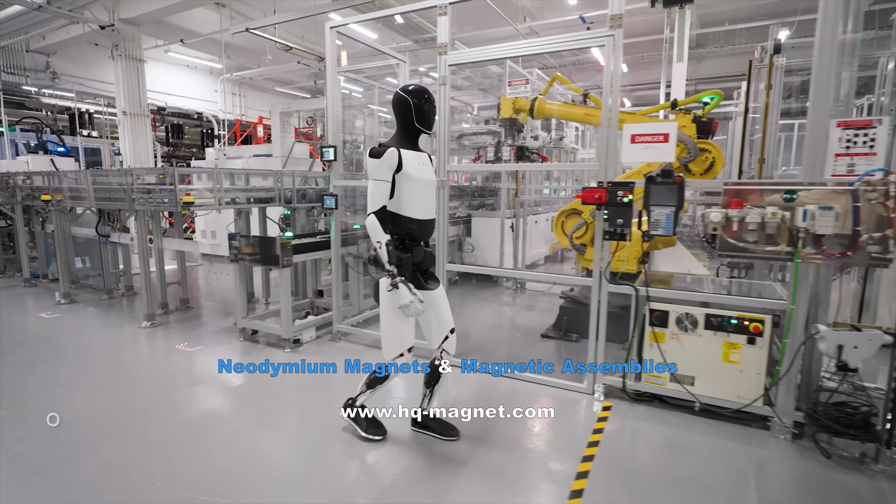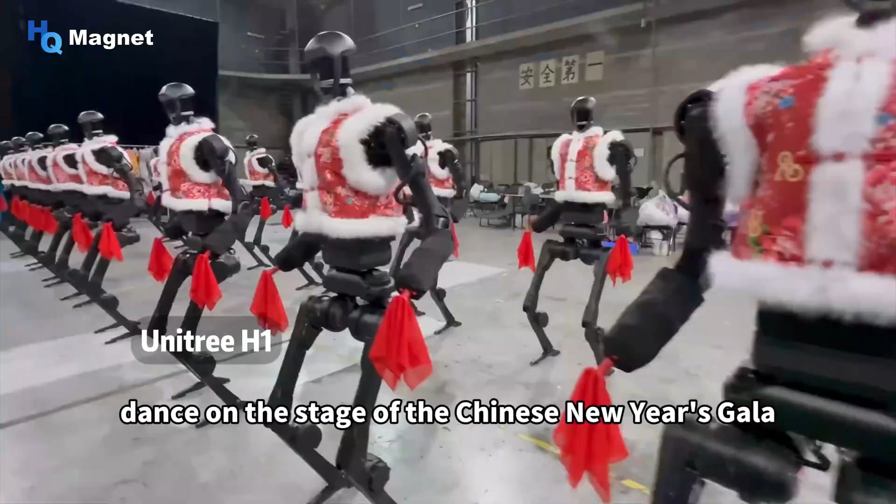From the Tesla Optimus working in the California factory, to the Unitree H1 performing the Yangko dance on the stage of the Chinese New Year's Gala, the revolution of intelligence and automation driven by motors is turning science fiction into reality. Just like the scenes in the Terminator movies, humanoid robots have now stepped out of the movie screen and entered the real world. It seems that the tipping point for the explosion of the robotics industry has arrived.

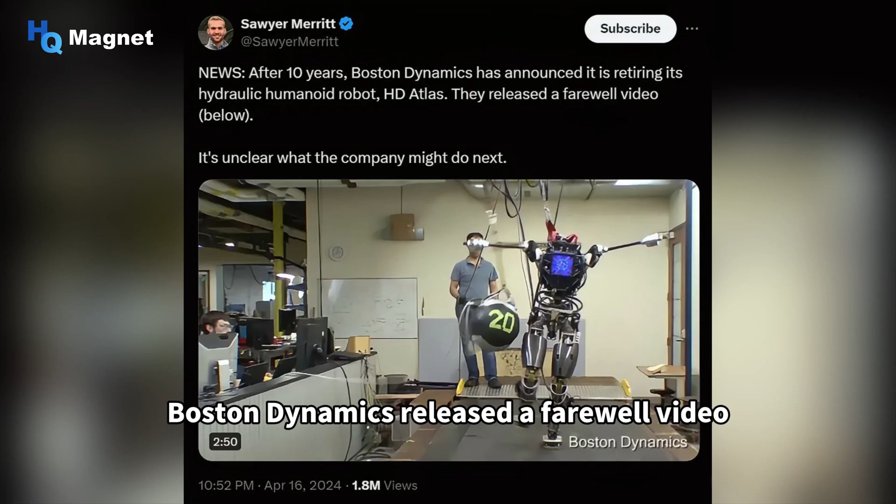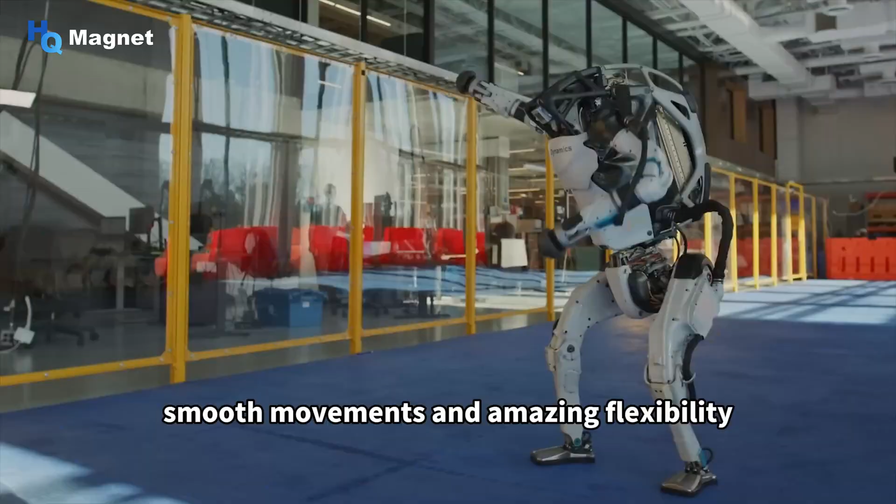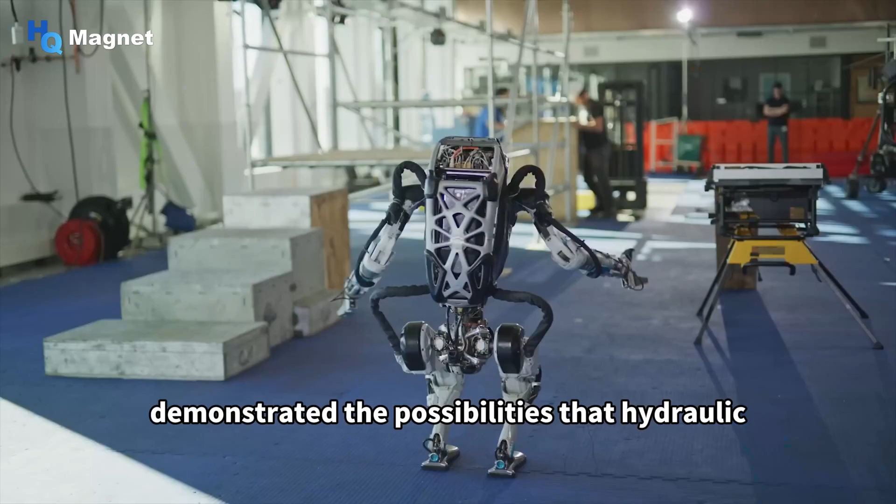On April 16, 2024, Boston Dynamics released a farewell video and announced the retirement of its legendary robot, Atlas. In the video, Atlas gave its final performance with its iconic smooth movements and amazing flexibility, including those complex walking, jumping, and backflip movements that once amazed the world. Every movement demonstrated the possibilities that hydraulic technology has brought to humanoid robots over the past decade. As Atlas slowly bows at the end, the era of hydraulic robots drew to a close.

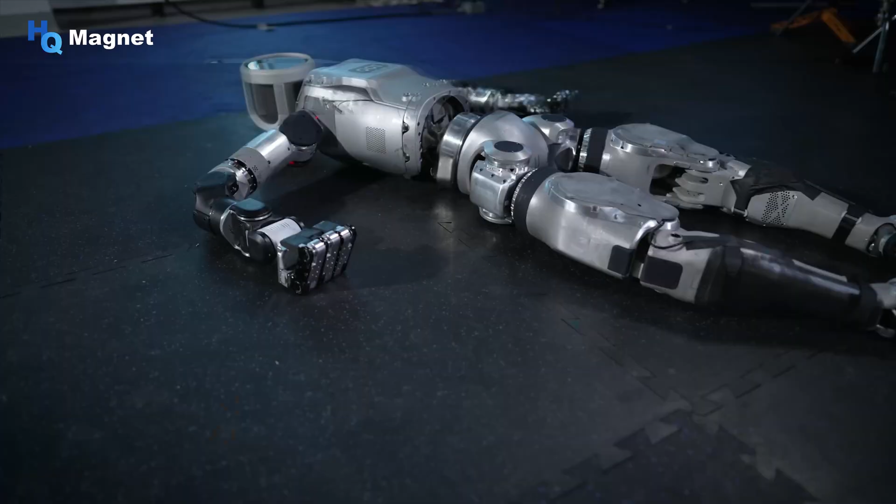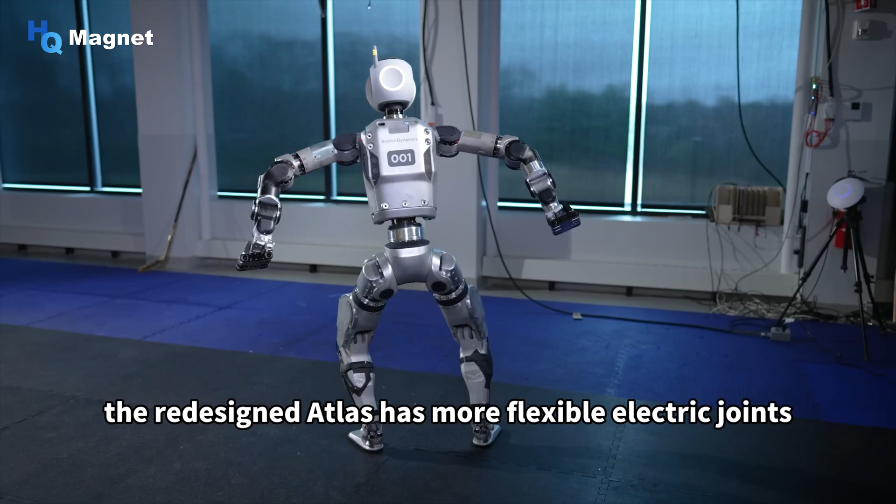Merely one day later, Boston Dynamics unveiled its next-generation Atlas powered by electric motors. The redesigned Atlas has more flexible electric joints, and multiple joints are capable of performing a full 360-degree rotation in all directions. This is a direct benefit of its advanced electric drive system, which enables unprecedented range of motion.

So why did Boston Dynamics transition from hydraulic systems they had been developing for over a decade to electric drives? At the 2024 World Robotics Conference, Marc Raibert, founder of Boston Dynamics, provided his perspective. He believes that hydraulic robots will continue to have applications in the construction sector, due to their superior load-bearing capacity and power output, but they face significant challenges in both commercial deployment and future improvements.

But I think that there's two things. One is that they are messy, and at least for high-performance things like we're in Atlas, with endless effort, we could never get them so that there was purely no oil coming out. And when you put oil robots into places like factories and homes, they just can't be dripping oil.

So that's one thing. It's very hard to find people who are skilled in the technology of hydraulics because people think of it as a very old world thing, even though Atlas has lots of innovation in how its hydraulics work, right to the servo valve, the HPU, the hydraulic power units, just all along there's really innovative stuff going on. And then lastly, I think electric motors have gotten strong enough so that at that scale, they can compete.

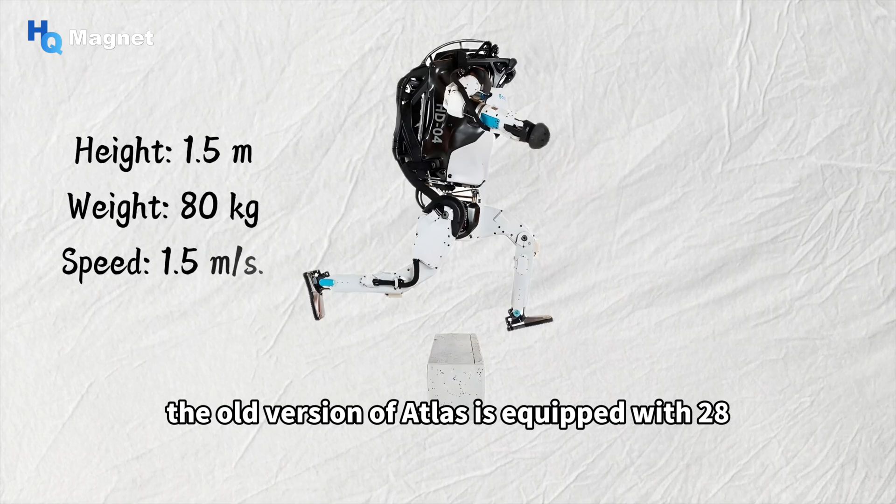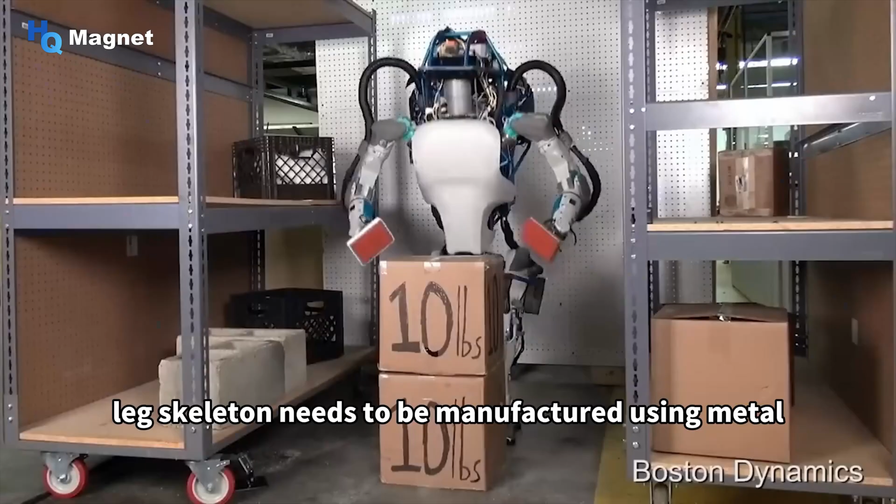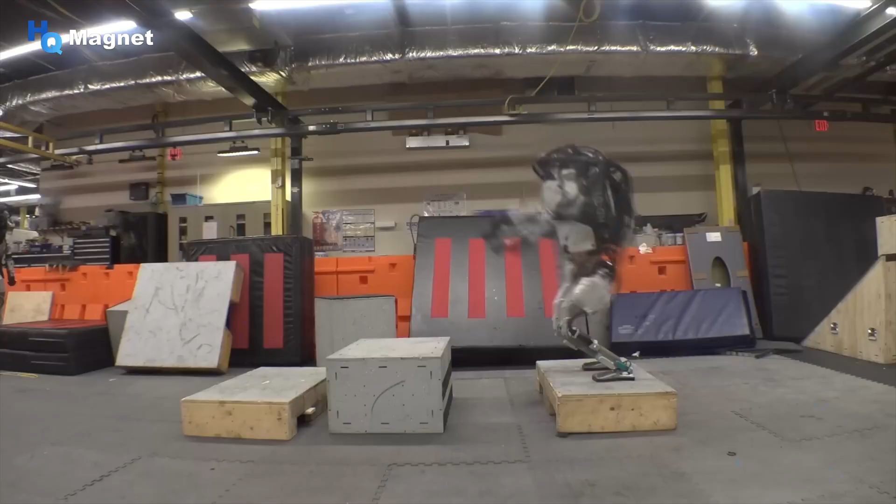The old version of Atlas is equipped with 28 hydraulic cylinders throughout its body, along with supporting hydraulic pumps, valves, and motors. The bionic-designed leg skeleton needs to be manufactured using metal 3D printing technology. The manufacturing cost of each robot is as high as $2 million, and the maintenance cost is also extremely high. It not only requires a professional team to deal with frequent failures such as oil leakage and cylinder bursting at any time, but also requires daily maintenance and regular in-depth servicing.

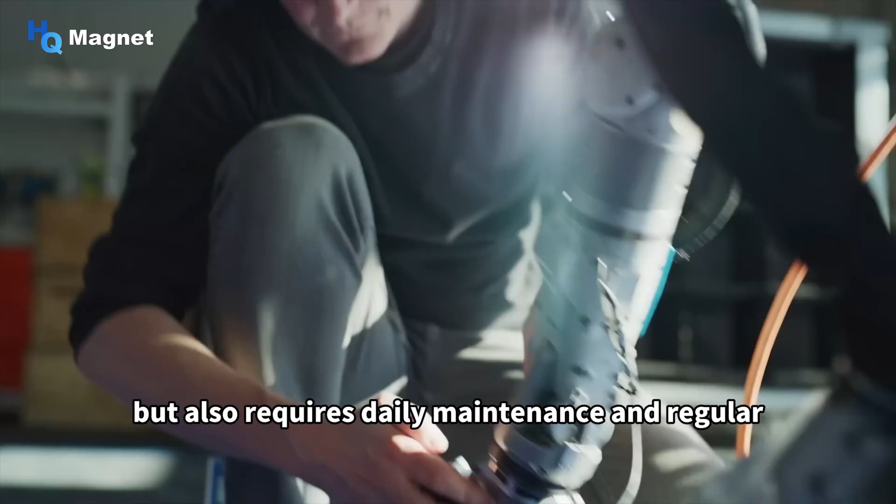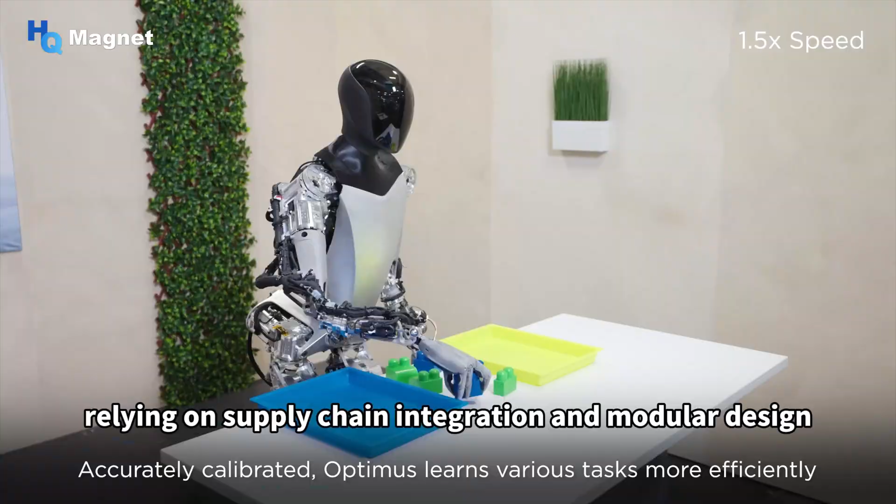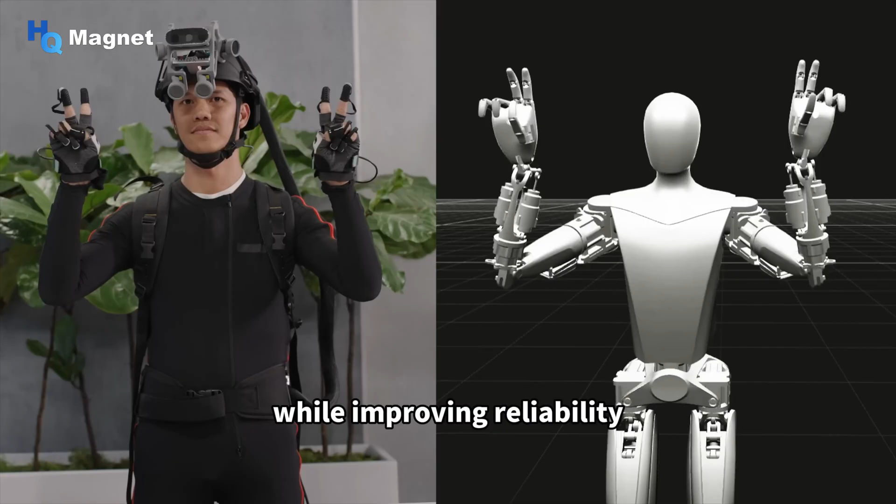Compared with the complex structural design and maintenance issues of the hydraulic system, the electric motor drive solution, relying on supply chain integration and modular design, has not only reduced the manufacturing cost to tens of thousands of dollars, but also significantly reduced potential failure points due to its simplified structure. While improving reliability, it has significantly reduced the maintenance frequency, which is of decisive significance for scenarios that require long-term continuous operation or remote operation.

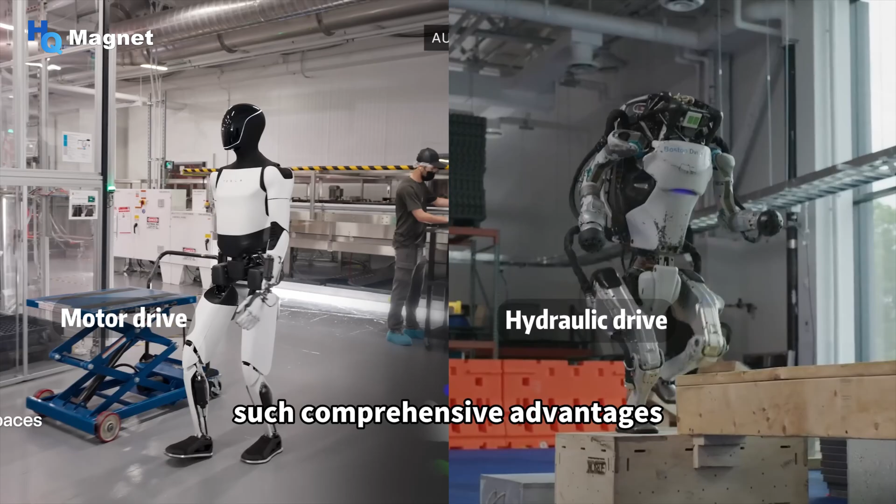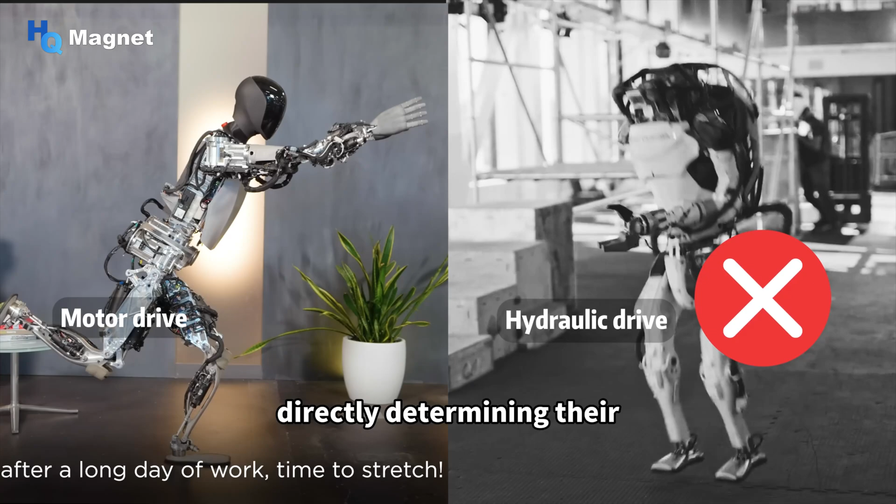Such comprehensive advantages, ranging from the design architecture to manufacturing and maintenance, have ultimately created an insurmountable cost gap between the two technical routes, directly determining their different fates in the commercialization process. Since the hydraulic system is so expensive, why did it become the early research direction for Boston Dynamics? Let's go back to the early 2000s first.

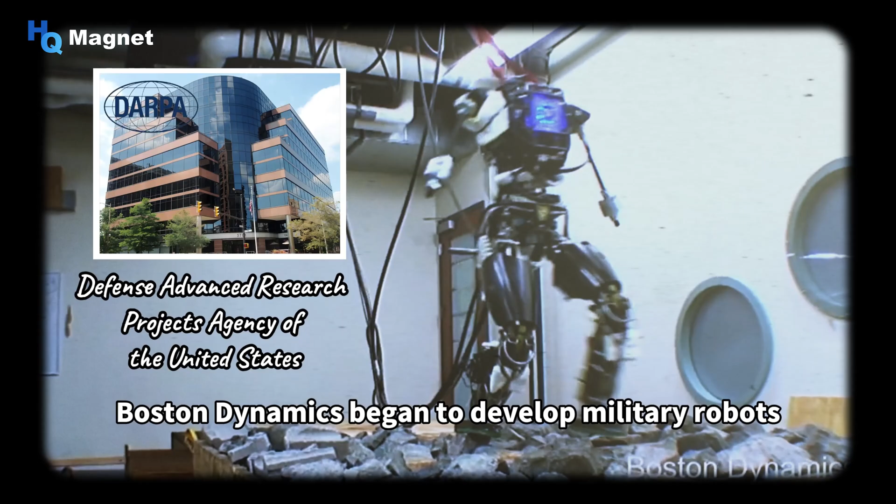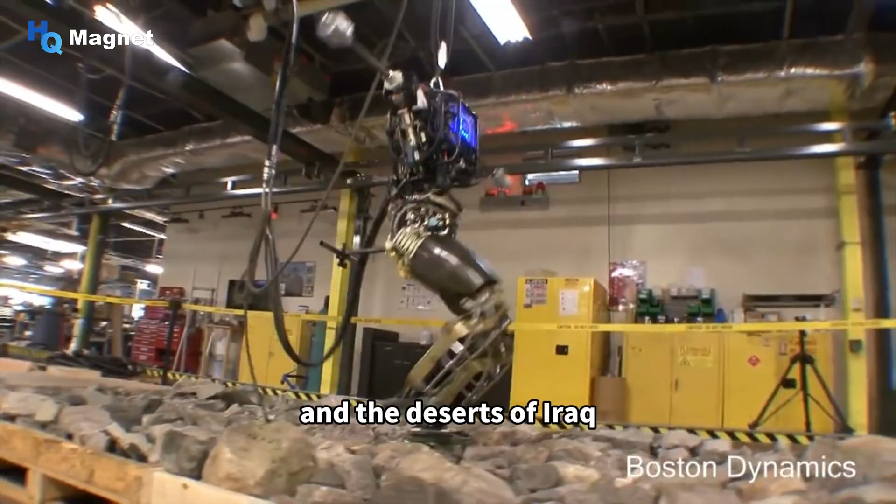With the support of DARPA, Boston Dynamics began to develop military robots. At that time, the battlefield requirements were extremely stringent. The robots were required to transport supplies in the mountains of Afghanistan and the deserts of Iraq, and they even had to be able to get up on their own after being knocked over by bomb shock waves. In such extreme scenarios, robots require robust dynamic capabilities to respond effectively.

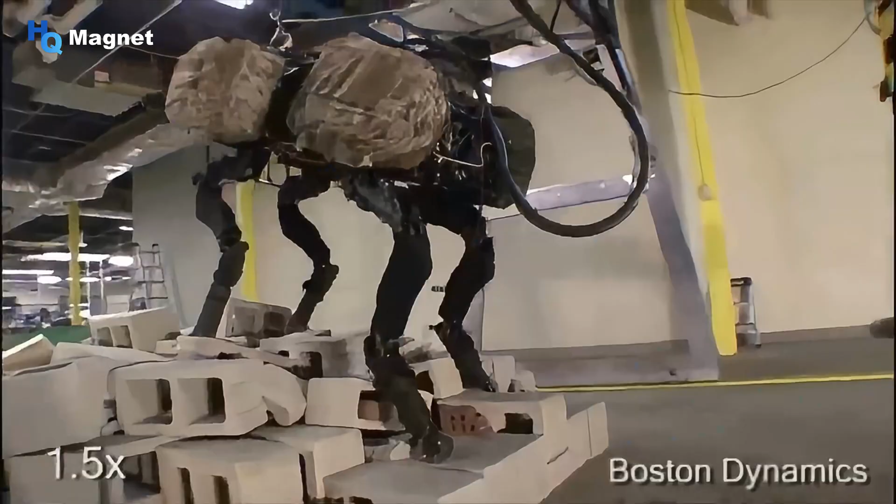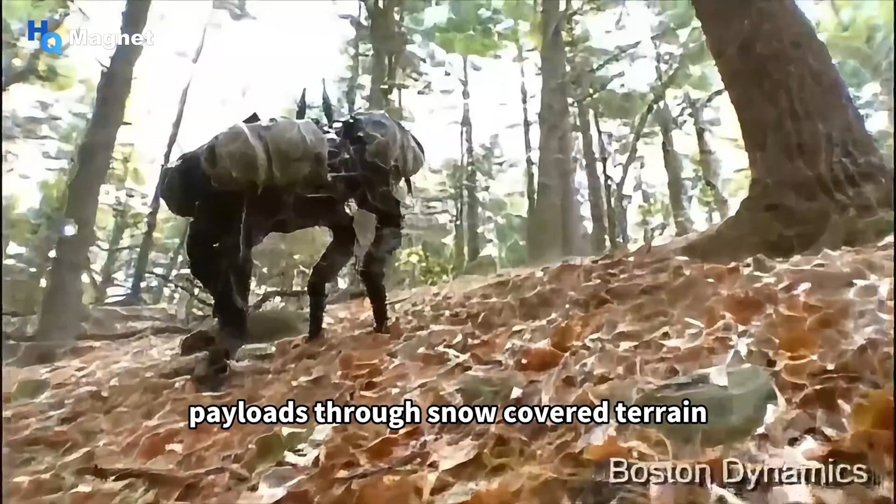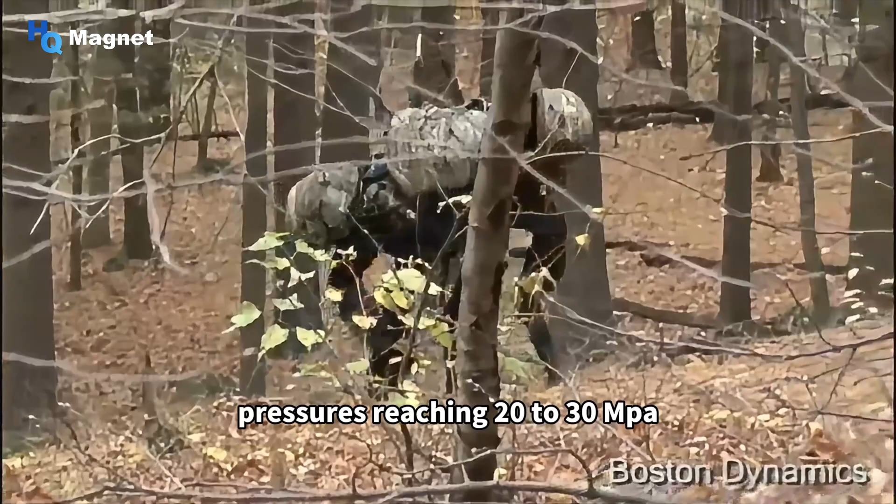At that time, electric motor technology remained immature, and hydraulic servo systems demonstrated higher torque and power density compared to servo systems of equivalent quality. The early developed Big Dog could carry 150 kilograms payloads through snow-covered terrain, with hydraulic joints demonstrating spring-like impact absorption capabilities. This formidable power originated from hydraulic pressures reaching 20 to 30 megapascals, equivalent to 300 atmospheres, enabling instantaneous power output several times greater than conventional electric motors.

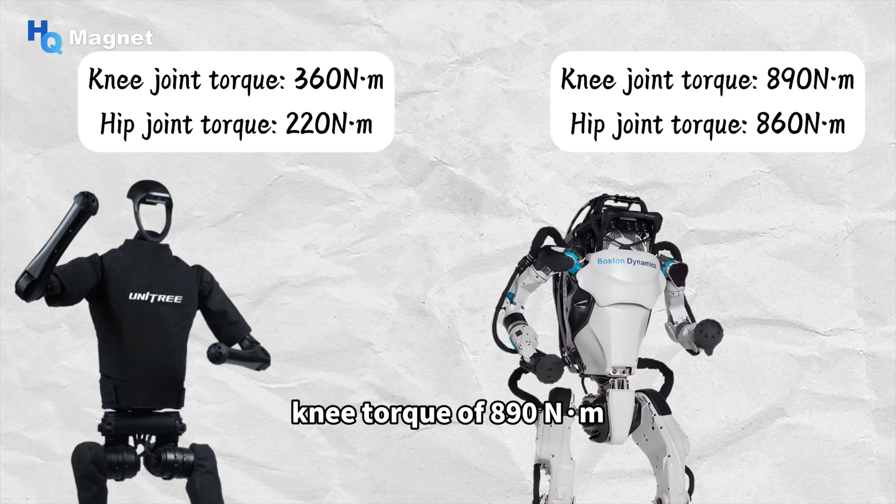Even today, hydraulic systems retain advantages in power output. Unitree H1 achieves a maximum joint torque of 360 Nm, while the hydraulic Atlas boasts knee torque of 890 Nm and hip torque of 860 Nm. However, compared to the technology of 30 years ago, modern motor systems have achieved remarkable breakthroughs in performance. Permanent magnet motors typically exceed 80% efficiency, with high-performance models reaching over 95%, while hydraulic systems suffer from energy losses due to friction and heat transfer, resulting in only 30 to 50% energy efficiency.

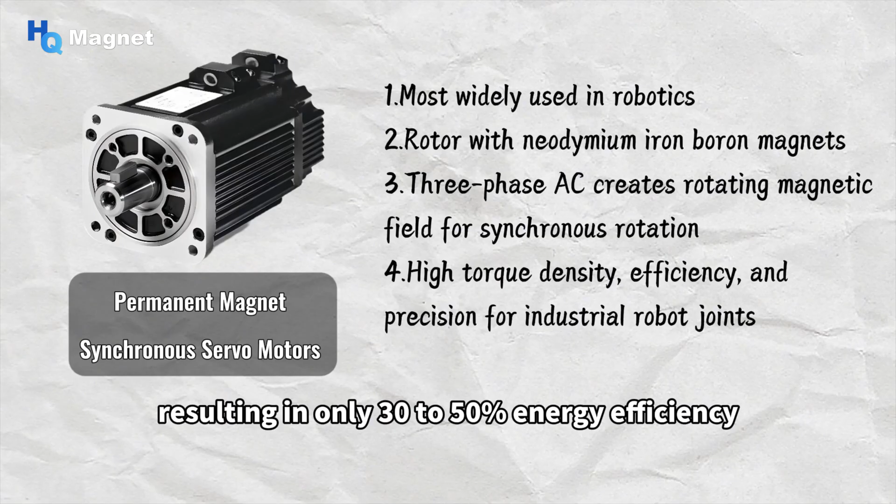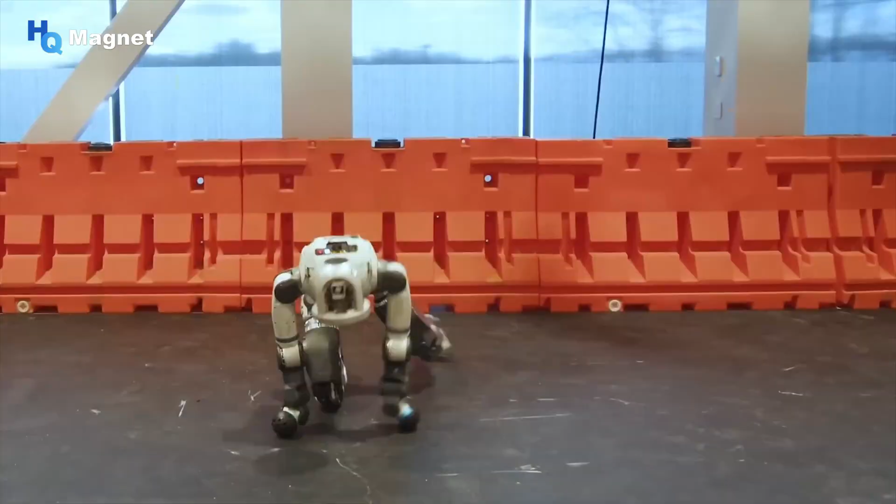Permanent magnet motors also have advantages in terms of response speed and precise control, enabling them to perform better in high-precision tasks. The high-difficulty maneuvers demonstrated by motor-driven robots have proven that motor systems now achieve motion capabilities comparable to hydraulic solutions. And the cost is low enough for people to ignore some of the gaps in terms of the motor's power. Additionally, electric motors powered by batteries generate significantly less noise, making them more suitable for noise-sensitive environments.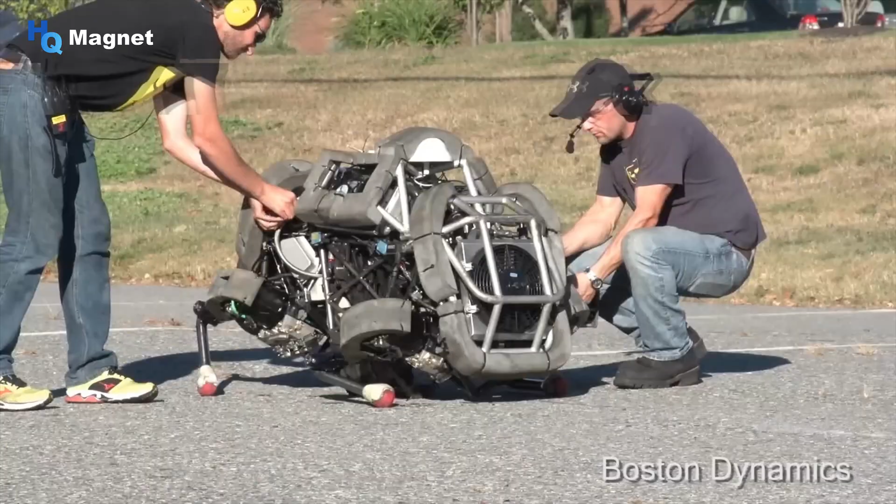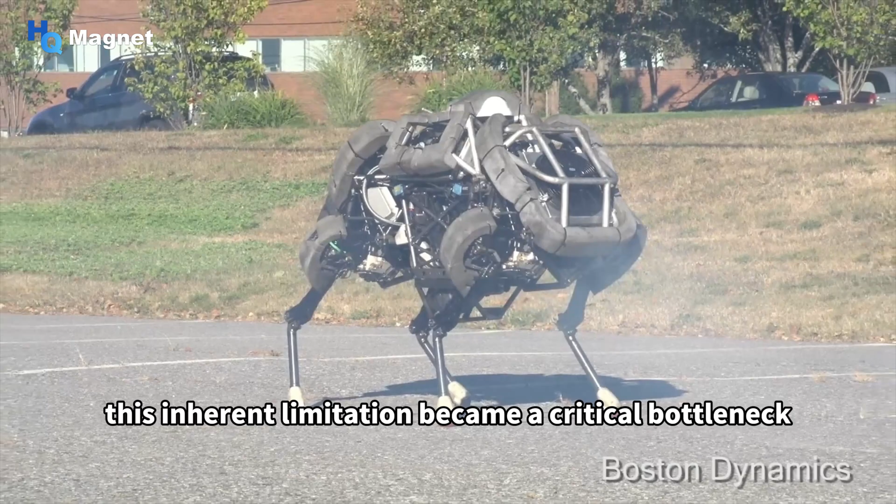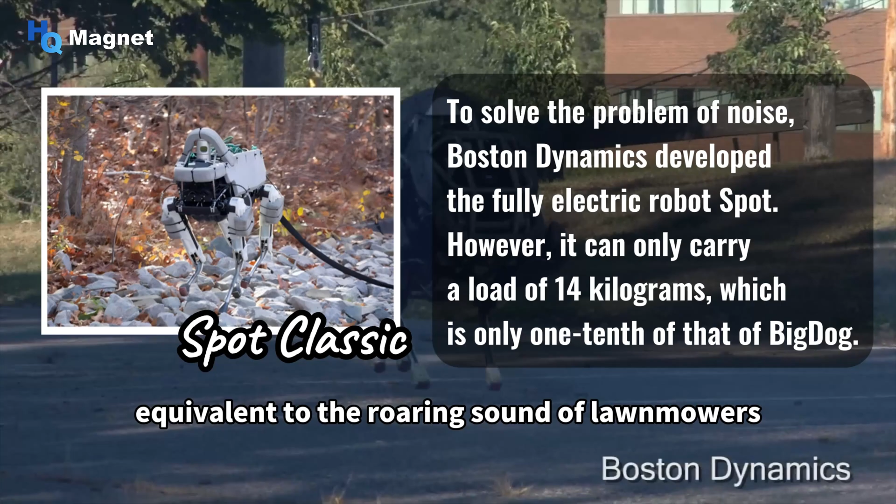In contrast, hydraulic systems require continuous high-pressure energy supply to achieve heavy load capacities, necessitating the use of internal combustion engines to meet the instantaneous power demands of hydraulic pumps. This inherent limitation became a critical bottleneck during the U.S. military's collaboration with Boston Dynamics to develop military robots. Their engine-generated noise exceeded 90 decibels, equivalent to the roaring sound of lawnmowers, allowing enemy forces to detect the equipment from several kilometers away. This fatal flaw ultimately forced the project to be halted in 2015.

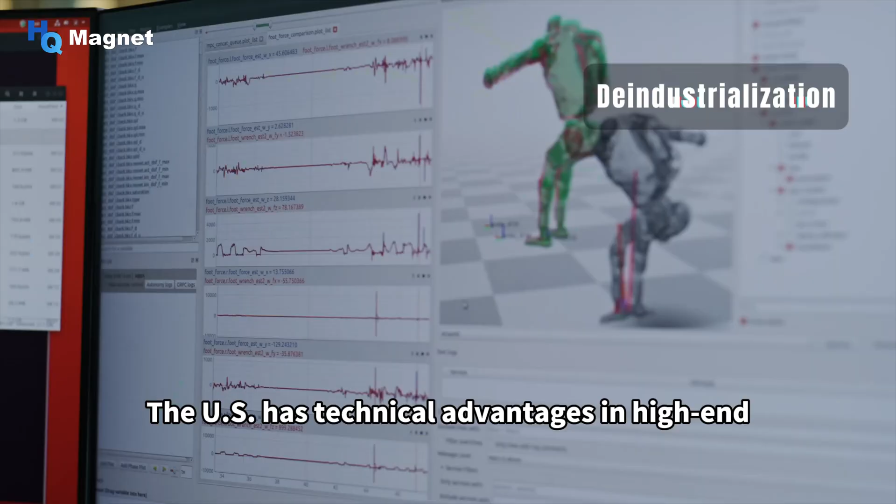Commercialization pressures are the ultimate reason for Boston Dynamics' technological transformation. Boston Dynamics has changed hands 3 times among Google, SoftBank, and Hyundai Motor, with investors' urgent profit demands compelling the company to reassess its technological roadmap. Behind this transformation also lies a reflection of the deep-seated competition within the global manufacturing ecosystem. The United States has technical advantages in high-end and sophisticated fields such as hydraulic systems, but it has faced difficulties in implementing these technologies due to the hollowing out of its domestic supply chain.

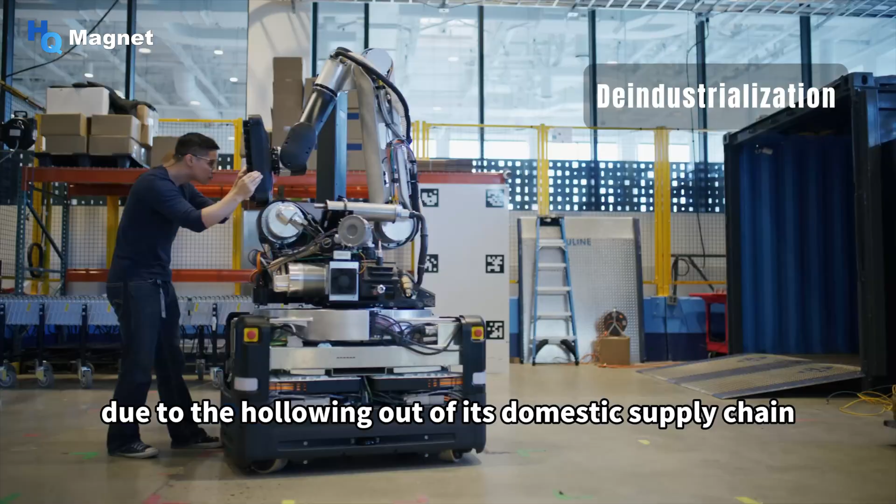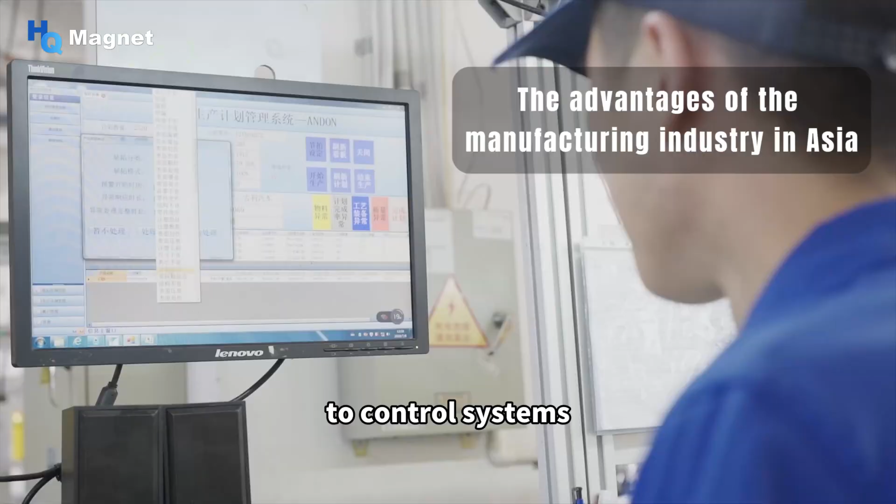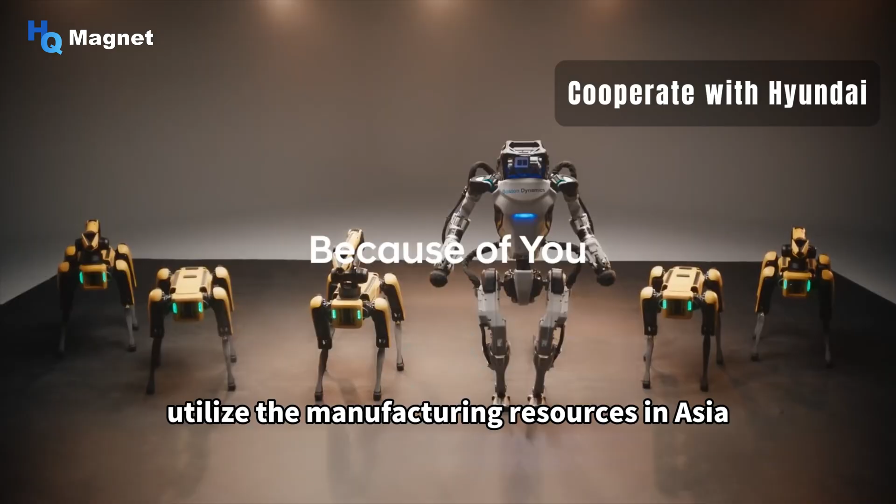In contrast, through the synergistic effects of industries such as electric vehicles and consumer electronics, China has established a complete ecosystem encompassing everything from electric motors and sensors to control systems. A more intuitive data comparison comes from the Go2 of Unitree in China. Its cost is only $900, and the selling price is less than $1,600. Meanwhile, the cost of Spot is $48,000, and the selling price is as high as $75,000. The cost difference between the two is more than 50 times. Boston Dynamics' ultimate decision to collaborate with South Korea's Hyundai Motor is also an attempt to utilize the manufacturing resources in Asia to break through the bottleneck of commercialization.

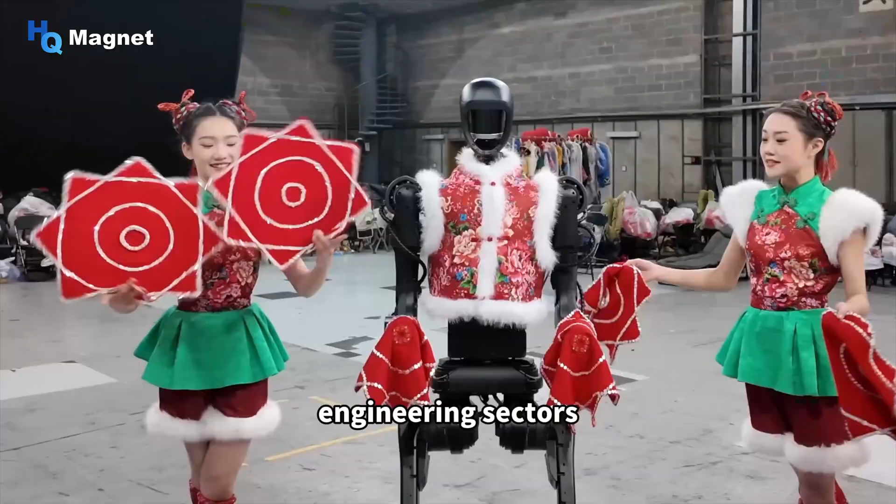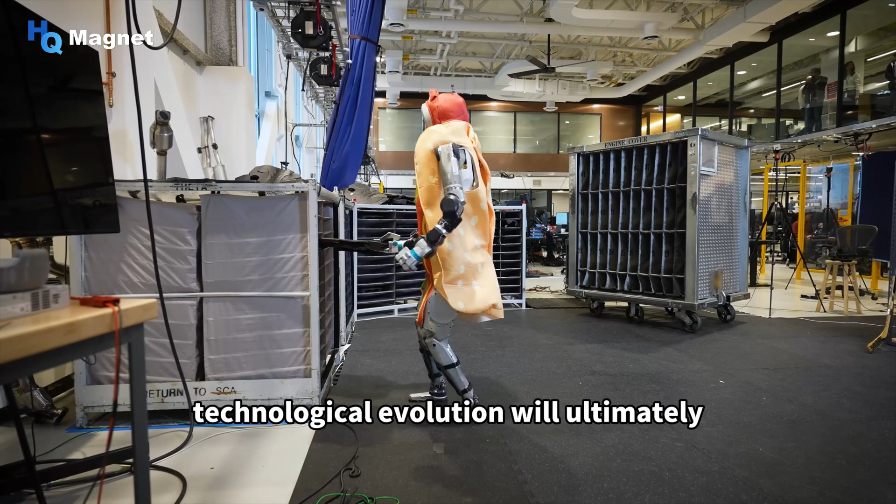At the dawn of the large-scale application of humanoid robots, we may be witnessing the opening of a new era for humanity. Hydraulic systems will continue to leverage their unique strengths in specialized engineering sectors, while electric drives are emerging as the passport to the era of general-purpose robotics. As Atlas transitions from laboratory prototypes to production lines and military-grade performance yields to consumer-grade experience, technological evolution will ultimately obey the ultimate law of survival of the fittest.